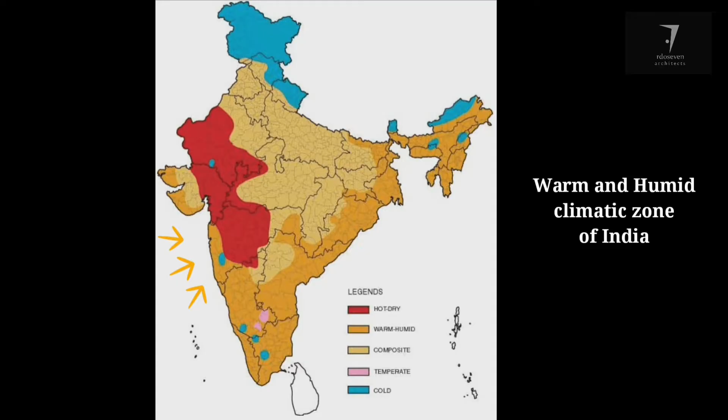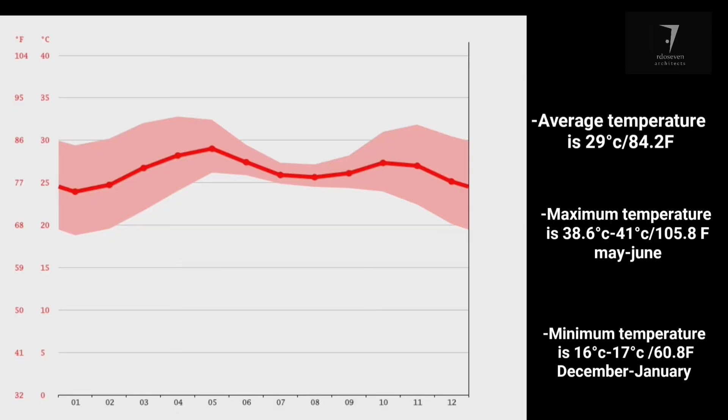The climatic condition of Mumbai. Basically, Mumbai comes in the warm and humid climatic zone of India. The average temperature is 29 degrees Celsius, which is 84.2 Fahrenheit. The maximum temperature is 38.6 degrees Celsius to 41 degrees Celsius in the summer, May and June. The minimum temperature is 16 degrees Celsius to 17 degrees Celsius in December and January. The annual rainfall is 2012 mm.

Structure of Kanchenjunga apartment. Kanchenjunga apartment is a high-rise building, 83.82 meters in height, with 28 stories and 32 luxury apartments with 3 to 6 bedrooms each. The Kanchenjunga apartment is in modern architecture style and brutalist architecture style. And the Kanchenjunga apartment is basically a 21 meter by 21 meter square plan.

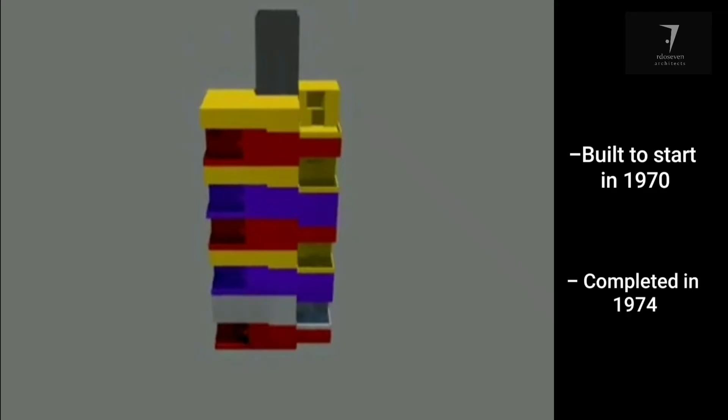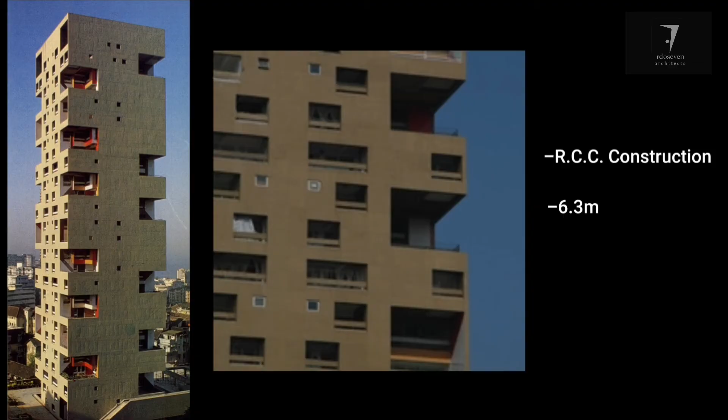Construction and material of Kanchenjunga apartment. Construction of the Kanchenjunga apartment started in 1970 and was completed in 1974. The architect of the Kanchenjunga apartment is Charles Correa and team, and the structural engineer is Shirish Patel. The construction is done in reinforced cement concrete, a 28-story building with a concrete structure and 6.3 meter cantilever beams. As a part of the materials, brick masonry has been used.

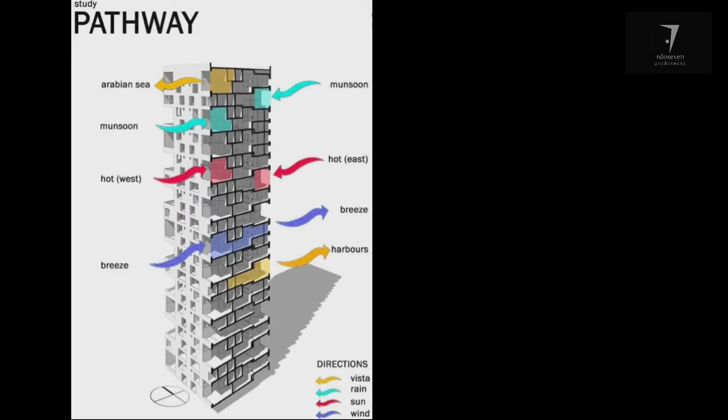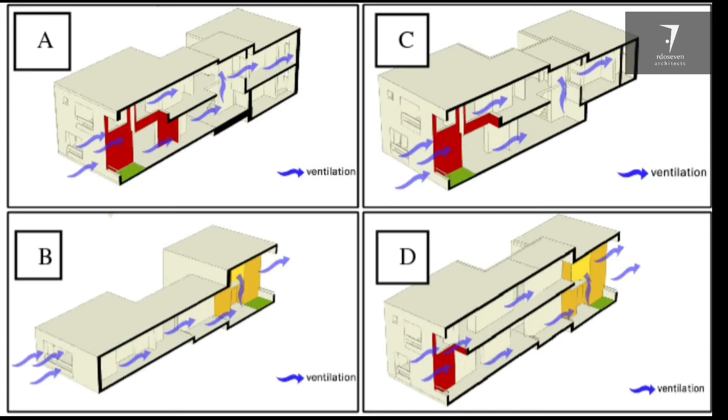Concept of Kanchenjunga apartment. Charles Correa followed the climate in the Kanchenjunga apartment. Basically, the shape of the building is responding to the climatic issue and responding to the present culture of escalating urbanization for the region. Another concept is to use two levels for the different size apartments, which is two levels at one end and one level at the other end.

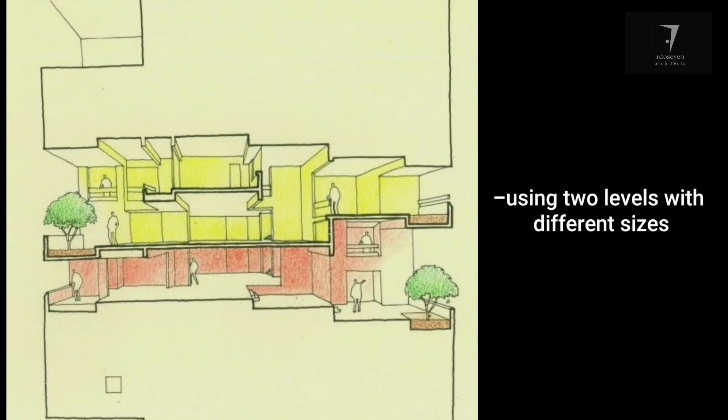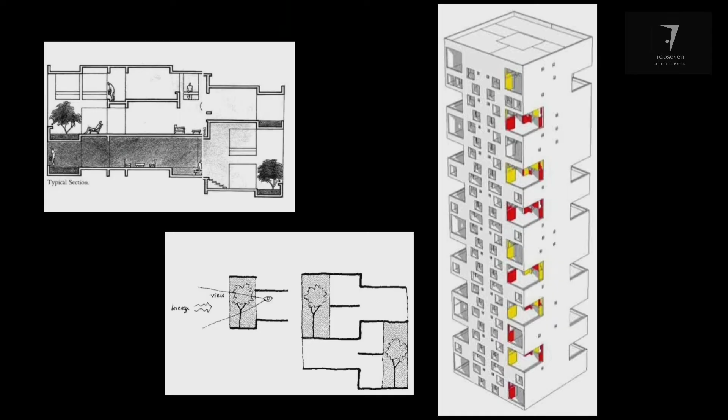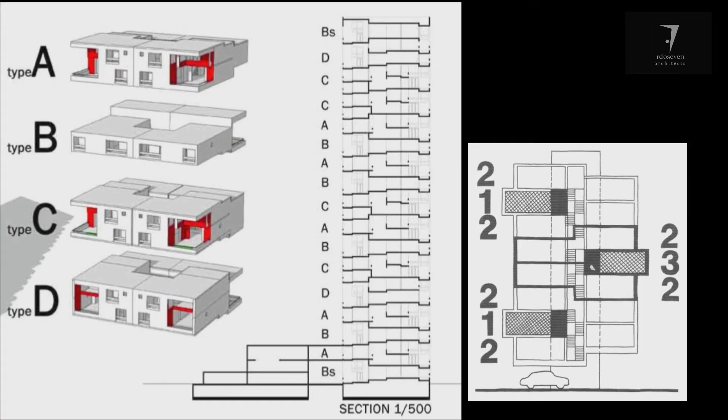Features of Kanchenjunga apartment. The first is the building has to be oriented east-west to catch the prevailing sea breezes and to open up the best view of the city. Another feature is the basic interlock of a 3 and 4 bedroom apartment with the larger flat form. Next, the structure is built around a central service core which was constructed first.

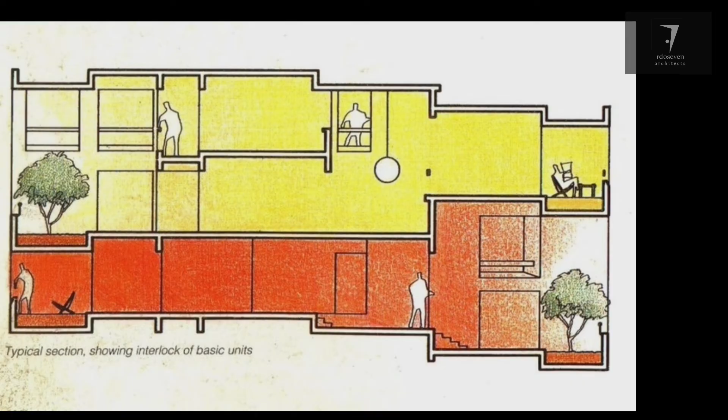Another feature is each of the flats has a larger usable garden terrace which has a dramatic city view. The terrace garden not only protects the living room from the sun and the rain but actually thrives on them. And combining climatic considerations with that of view, he settled upon a configuration of interlocking units which face east and west. The garden terrace is actually a modern interpretation of the traditional Indian bungalow with the veranda. Each apartment is provided with a deep 2-story high garden terrace.

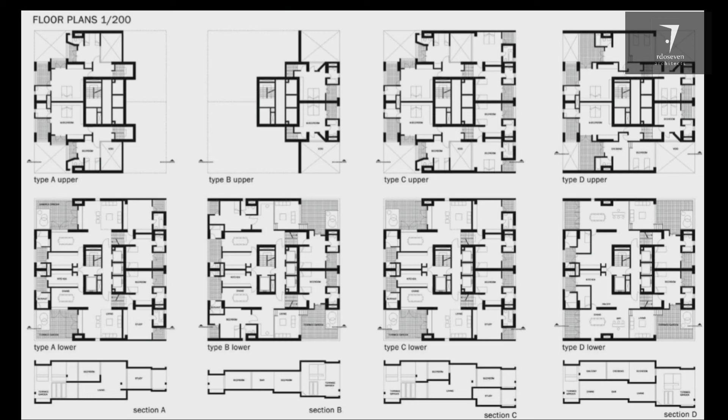Plans analysis. These are the floor plans of the Kanchenjunga apartment. There are 4 different units in the floor plans. The building has been planned in east and west orientation, with the west side of the building having the sea and the east side having a view of the city, which plays a dynamic role for the building. The orientation towards the hot sun and heavy rain does not give a positive value, but they provide a veranda, which catches the cool breeze and gives comfort to living. And this is one of the best works of Charles Correa.